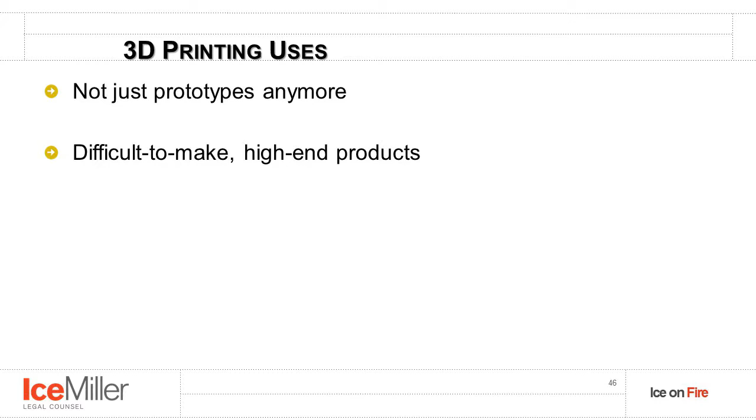Now, when it comes to 3D printing uses, we've talked about the fact that it's not just prototypes anymore. As Kelly mentioned, prototyping is something 3D printing is extremely well suited for, because you can make something faster and cheaper, and you can see if it works. And if it doesn't, you can prototype another one.

But it's not just for prototypes anymore. Now companies are making difficult to make high-end products. 3D printing at this point is too expensive and too time-consuming to make 15,000 air vents or 15,000 little pieces for a car, presumably. That might be changing, but really where we're seeing it is difficult-to-make high-end products or prototyping. I was talking to George at my table, who is in the control system business. They make control systems for HVAC systems and so forth. If you're making a prototype of a new system, this might be well suited for it. Now, if it's the final product you're manufacturing, maybe not, at least not yet.

Now, we see this in aviation, the automotive industry, and life sciences. In aviation, for example, here's the new Boeing 787 LEAP engine. I'm not sure if you can see, but just to give you a sense of how big that is, you can see the guy standing next to it in the middle. It's a big engine. One of the things GE, the manufacturer of this engine for Boeing, is making now is jet fuel nozzles. There are 19 of these all the way around inside each of the engines on this two-engine Boeing 787.

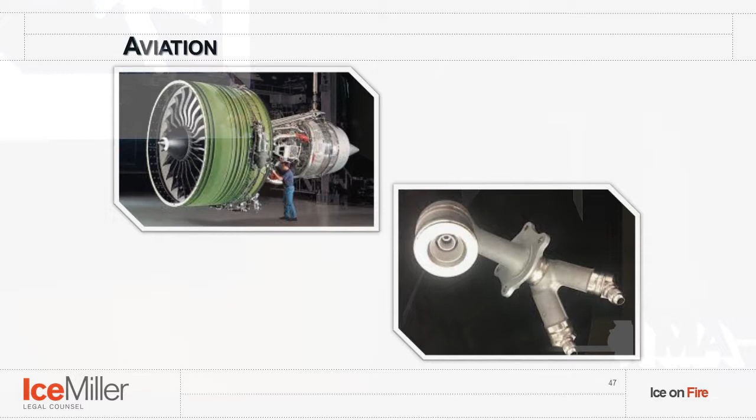Now, previously, and this is a very sophisticated piece of machinery, this nozzle basically shoots fuel into the combustion chamber. It's got to mix it at absolutely precise measures to make sure there aren't heat surges, that there aren't problems with the nitrous oxide levels and so forth. Previously, this was manufactured, it took a long time to make, had 20 different pieces that all had to be welded together. Now it's being printed using 3D printing. It's one piece. There's no waste.

It's 5 times quicker to make, faster to make, and 5 times more durable than the existing nozzle. It's also a pound lighter than the existing nozzle, which saves about 40 pounds per plane. And when it comes to aviation, lighter is

the best, it's absolutely essential. So they're making this. Now, from a litigation standpoint, let's say something goes wrong. Well, we'll get to that in a second. Let's talk about automotive real quick.

Automotive, this is becoming more and more used. Now, let's say this is not the perfect example, but let's say you're a collector of old cars, and you've got a 1938 Duesenberg. Fair disclosure, I'm not the biggest car guy, so I'm not even sure if Duesenberg made a 1938 model. Maybe some of you know. If they didn't, correct me afterwards.

But let's say you dent that, and you need a replacement. Well, you can't go down to Napa Auto Parts and ask for all the different side panels for a 1938 Duesenberg, because the answer is going to be zero. So what do you do if you're a collector? Well, if you're like Jay Leno, who has about 200 old cars, he actually has a 3D printing machine, and he prints replacement parts. People are printing engine blocks now out of 3D printing. It's not for commercial use yet, but it's coming.

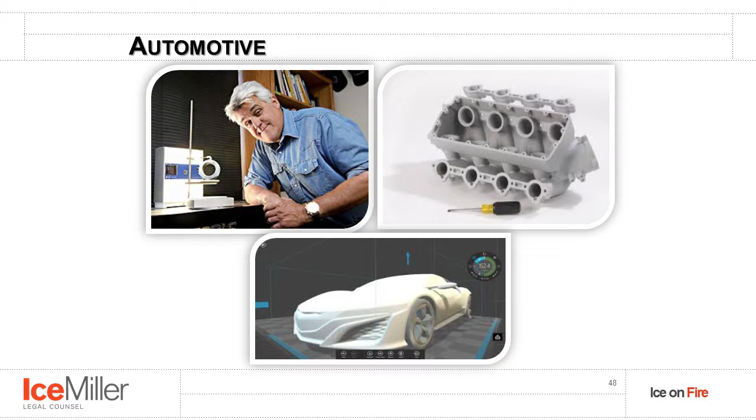Finally, one of the things automotive companies are now doing is printing full cars, obviously the outside of the car. We heard about the example at the auto shows where they're printing real ones that aren't roadworthy yet, but they're printing the shell of the car for wind tunnel testing, as opposed to the previous method where they're shaving off clay in just the right amounts and adding stuff back where they shaved off too much. Now they just program it, push a button, it takes some time to print, but they can do it precisely. So we're seeing it in automotive.

We're also seeing it in life sciences. Portions of skulls that people are using if they have to have brain surgery. One of the stories I heard about recently is somebody in the military who was hurt by a roadside bomb in Afghanistan, and who had to have a portion of his skull removed to relieve the swelling. They had to get a replacement part, and in the past they used different plastics and so forth to put on, but they didn't have a precise way of measuring.

Now what they can do with 3D printing is take a picture, send it to the United States, and have it printed out in a matter of hours. It's put on a plane, a military plane, and 24 hours later they're putting this precise piece of skull replacement in an operating room in Afghanistan on that person's head. We see it—we talked about the teeth before.

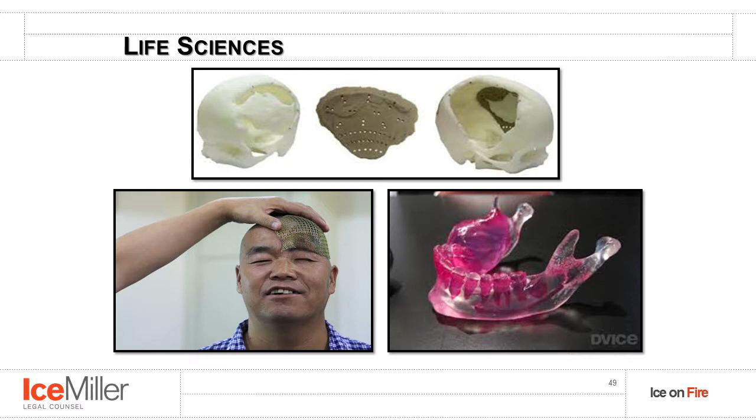So let's focus on how litigation is going to be changed by 3D printing. We are kind of in a brave new world. There are a lot more questions than there are answers, but let's take that GE jet engine nozzle, for example.

Let's say, God forbid, a plane crashes, a 787 crashes, the NTSB does its investigation, and it turns out that jet engine nozzle was to blame. Now let's say you're GE, or you're the component part maker who made that part for GE. Well, there's a good bet that you're going to get sued. How do you prevent that from happening in the first place, and how do you protect yourself if it does happen?

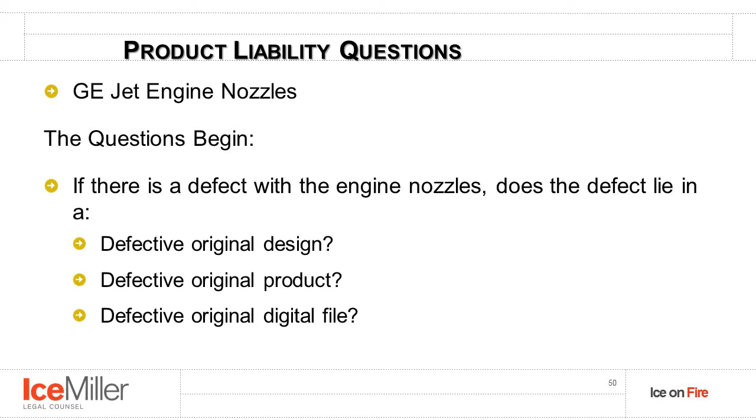Because it's not just you who's going to get sued if that part was manufactured using 3D printing—it's also going to be the software designer who designed the software that told the 3D printer how to lay down its material and build that part. We're going to have all sorts of questions. Was there a defect with the jet engine nozzle, and where does that lie? Does it lie with the original design by that software engineer? Does it lie with the product that you made? Did the digital file somehow get corrupted? Was the 3D printer that it was manufactured on somehow defective? Was it the material that you used?

And for GE, they're using not plastic for that nozzle, but a cobalt chromium metal to actually make that.

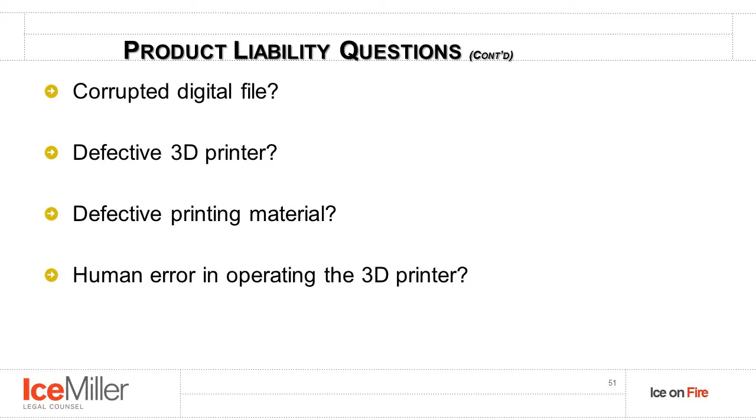So we're talking about food, metal, plastics, obviously. Was the material wrong? Was there human error with the 3D printing manufacturer? These are all questions that are going to get asked because everybody, unfortunately, is going to get sued.

The questions continue. Who's liable? Is it the software designer? Is it the manufacturer of the printer laying that down? Is it the manufacturer of the printing material? You bought that printing material from somebody and said, we need cobalt chromium metal that meets absolutely specific levels of tolerance and so forth.

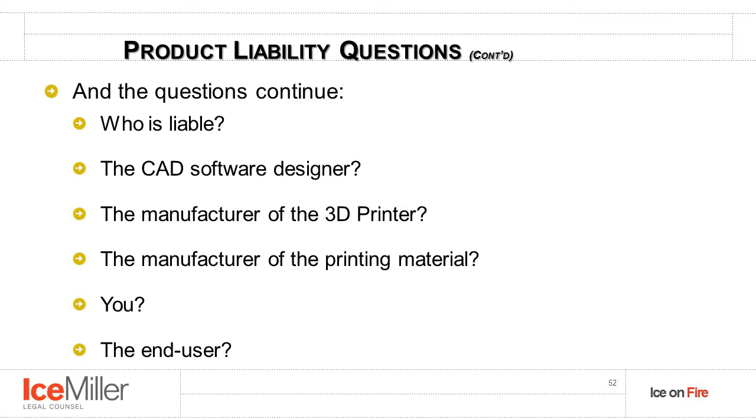What if they gave you the wrong material? Was it you, the end user? Was it the airline who failed to maintain it? Where do we look? Well, we look to the software designer first.

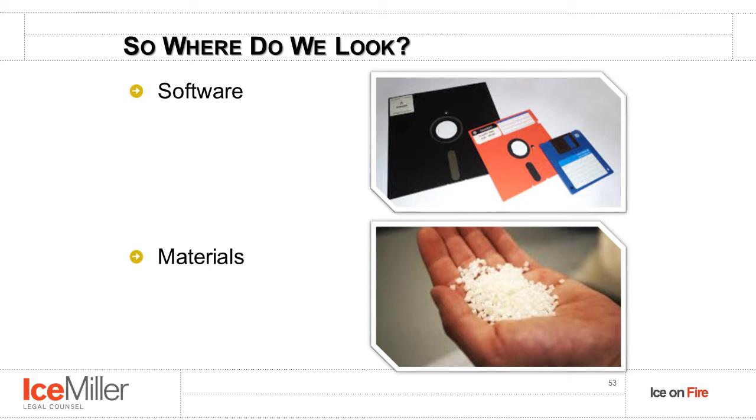You're going to look at the materials maker, the 3D machine manufacturer, and you're going to be looking at yourself. If you are a component part maker, you're going to be looking downstream to whoever you gave it to. If you are making that for GE, did they somehow install it incorrectly? Did they somehow tweak it that caused problems? Or was it the end user, the airline?

So let's talk about software very quickly. Is the software traceable? Because with 3D printing, as we heard from Alan, some people said, you know what, we're going to put our software out there. Anybody who wants to make this part we're already making, we'll put it out there. We'll put it on the Creative Commons.

Or you might hire somebody to specifically do that design for you, a software company. Or you might have that in-house, some of your software folks. So where are you getting your software from? Are you getting it again from the Creative Commons?

What could go wrong with the software? Well, if anybody here has a computer, or any kind of device, things go wrong with software. The software could be designed for a different purpose or a slightly different product, but you try and use it. Maybe you try to use stuff made for a slightly different design, but your tweak doesn't work. You have corrupted software. Sometimes when you open up a CAD file on a certain system, it's going to corrupt it. You might not realize it at first, but once the product is made, that product might not exactly work.

So who is to blame for the software problems? Well, if you're the manufacturer and you've hired some software company to do your software design for your 3D printing machine, hopefully the answer is not you. Hopefully it's the designer, because if you're getting sued, you don't want it to be you. Who's on the hook for the software problem? Again, hopefully anybody but you.

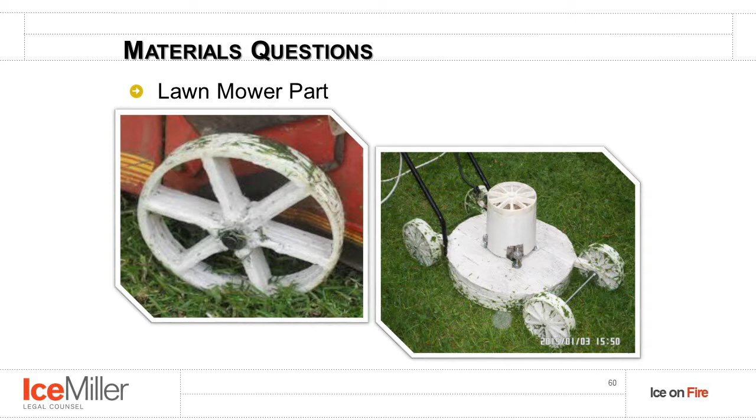Now let me go back for one second. Let's say you are hired to print those wheels using 3D printers, and you have a choice of materials to make it from. One is a kind of plastic called polylactic acid, which is biodegradable.

Polylactic acid, which is biodegradable, or high-density polyethylene, which is not biodegradable. Anybody who's mowed a lawn in the morning knows there's dew and water, and that part is going to get wet. So if you choose a biodegradable material, there's a very good chance that over time it's going to fail.

So you need to know what materials you need to use, and more specifically, what do I know about the materials? Do I even know what's in the 3D printed materials? Do I know that it's right for my product? If it needs to be biodegradable, it better be biodegradable. If it can't be biodegradable, it better not be. Is the material manufacturer providing me with MSDSs, so if something goes wrong at the plant, I know what to do?

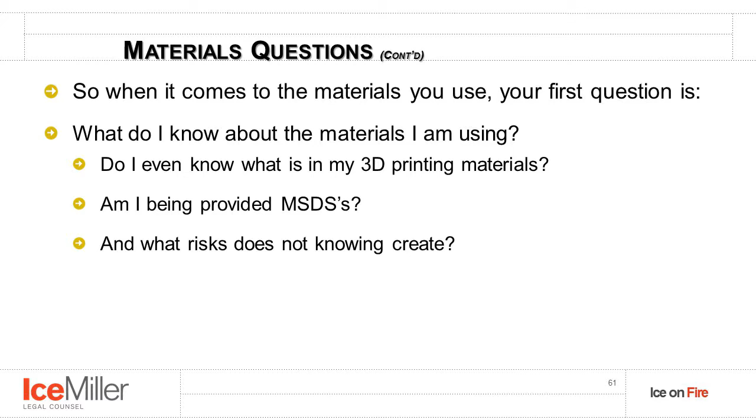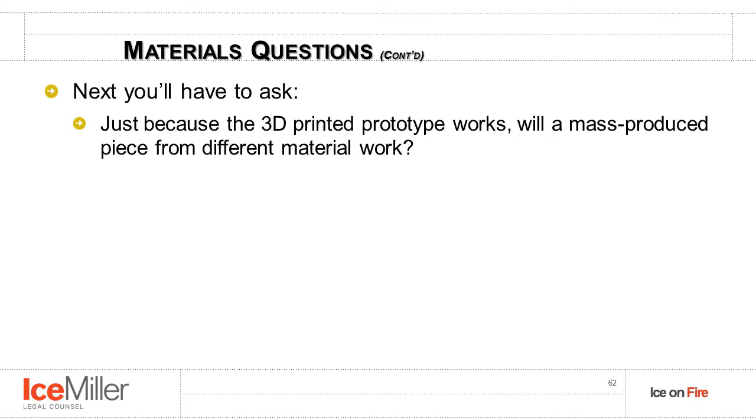What is the risk of not knowing what's in the materials? It creates a lot, because if a product fails and it's the fault of the material you decided to use, who's going to be on the hook? It's going to be you. So you want to know what's in it, and you're going to have to ask: just because I made a 3D printed prototype out of one material, does that mean it's going to work on the finished product? Maybe not. Maybe if I use a non-biodegradable material for the first product, and then choose to make the final end user product out of biodegradable materials, I'm going to have a problem.

So you need to be thinking about all these questions ahead of time. Then you have to ask, is this material certified for the use that we're using? Certain states and the federal government, as we're going to hear about, say you can't use certain materials for certain purposes.

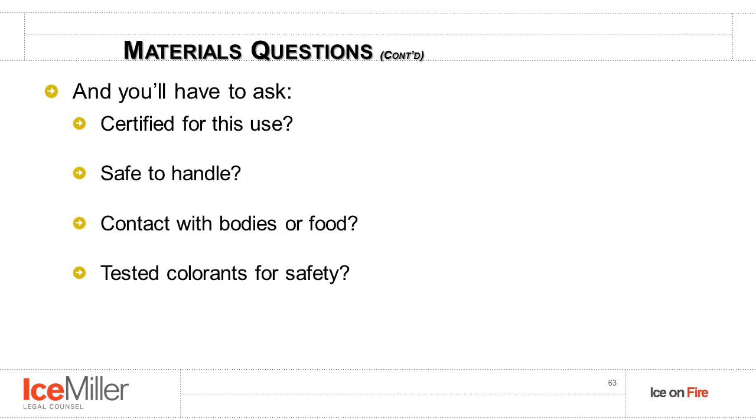Is it safe to handle? Are you putting your workers at risk? If there are issues, you need to provide them with face masks, gloves, or what have you. Is your product going to be coming into contact with the human body, like that skull piece, or food? Is it going to be a tray that people put food on? If it is, you need to be asking: is the material I'm printing with safe to come into contact with food? Does it leach things out? If there are colorants, have those been tested for safety?

All of these questions, if you think about them and answer them ahead of time, and think about the problems they can create, you can reduce your risk of something going wrong with your product, and reduce the risk of having to come see me, which you don't want to do. Who's on the hook if there is a problem with your materials? Again, hopefully anybody but you.

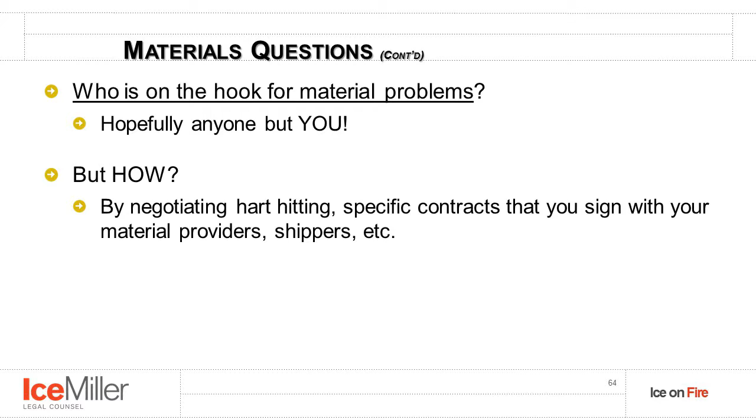How do you make that happen? Again, hard-hitting, specific contracts with your materials provider that state exactly what they're providing you, that the tolerances it's going to meet are going to be there with the shippers. If something shouldn't be shipped above a certain temperature, and it is, and that causes a problem with the material, you want to be protected. You want to be protected with a contract.

We're in a brave new world. There are few regulations when it comes to 3D printing. There are lots of questions, as we see, and there are few answers. But you want to be thinking about these questions ahead of time, so you can, number one, avoid litigation if at all possible, and number two, if litigation occurs, be protected with contracts that provide you with indemnity from the software designer and the material manufacturer.

There's not a whole lot of case law out here. What do you do? Again, contracts. Protect yourself with a contract up front with the software designer, the materials providers, and the 3D printing manufacturer, possibly with end users, to make sure they're using it right and can't point the finger back to you. Because ultimately, litigation, if you've gone through it, is kind of like musical chairs.

You want to have a seat when the music stops, and you want to make sure that you are the one with the seat, and if something else goes wrong, it's somebody else who's on the hook for it. Again, if you think about these problems ahead of time, hopefully nothing will go wrong.

Let me talk very quickly about some insurance issues. The first thing that you want to do if you haven't entered into 3D printing and you're thinking about it is have a talk with your insurer or your insurance broker, because you want to make sure that you tell them about these new issues.

You're going to have new machinery at your plant. It could create new risks. It could also lessen the possibility of risks, which might reduce your insurance premiums. And obviously that's a good thing.

Are there potential risks, increased risks of fire? Some of these machines, as we heard, tend to run hot, several hundred degrees. Now, that might be less hot than some of the equipment you're already using, but again, you want to know this ahead of time. You should be also thinking about the following, because these are the kinds of things that could help actually reduce your premiums.

Are there increased manufacturing risks when using 3D printing? Maybe you could argue that they're not, because these are more precise machines than what you're using now. Are they safer to use? Are there fewer chances of people getting injured using these machines versus some huge press that has thousands of pounds of PSI? Probably.

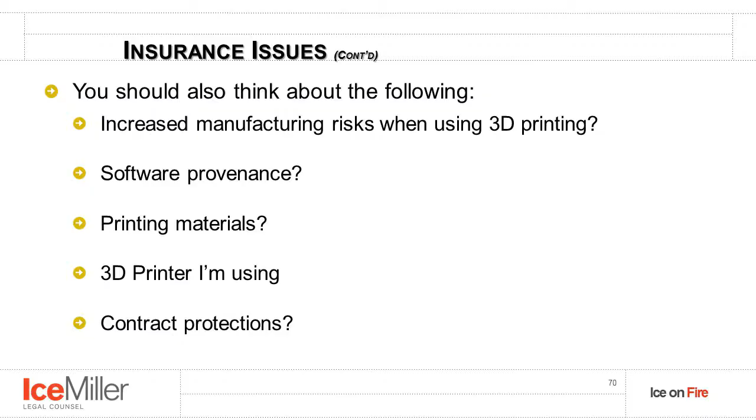Again, if you can point to your insurer that you have very good knowledge of where your software is coming from, and you've got knowledge of where the printing materials and the printer are coming from, and you've got these contract protections, you can say to them, hey, we've got things covered. We have reduced our risk, which means we have reduced your risk, Mr. Insurer, which means you should reduce our premiums.

Ultimately, when it comes to litigation and insurance, you want to keep calm, document everything, get very tightly worded contracts with the people you're working with, because ultimately it will help avoid litigation in the first place, and if it does occur, it will protect you in the second place.